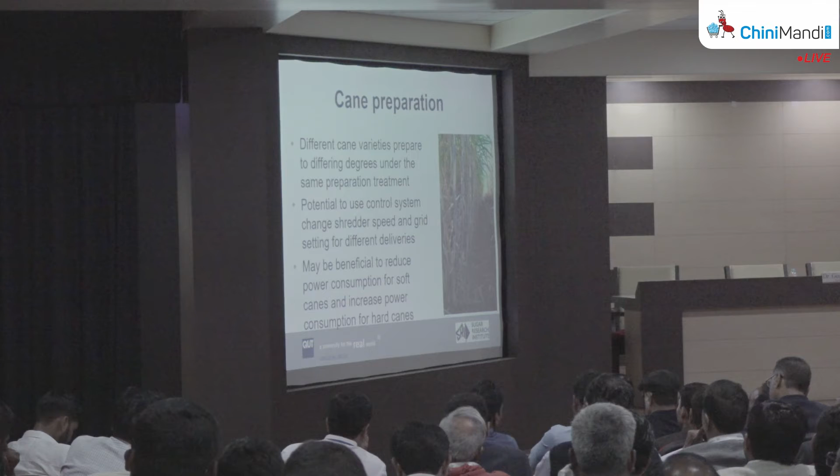So there is potential to make changes with control to things like shredder speed and shredder grid setting for different cane deliveries. It may be beneficial to reduce power consumption with soft canes and increase preparation or power consumption on harder canes, giving a better overall extraction result without increasing overall power consumption. That's something we're still currently working on.

With the added water rate, it's fairly well understood that there is a need to maintain good extraction, and a need to increase the added water rate in proportion to the cane fibre rate.

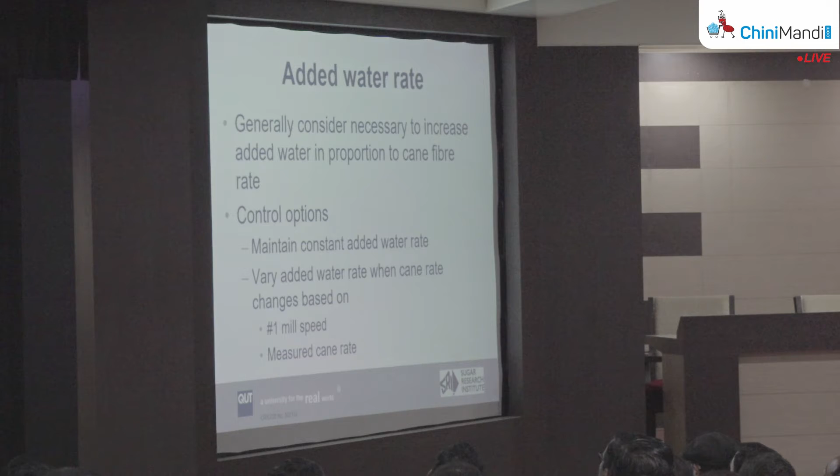When it comes to doing that with a control system, there are many different ways added water rates get controlled. One is simply to have a constant added water rate, manually adjusted as conditions require. Another is to vary the added water rate when the cane rate changes - a simple way is to change it with the speed of the first mill, or more sophisticated, to measure or estimate the cane rate and change it with that.

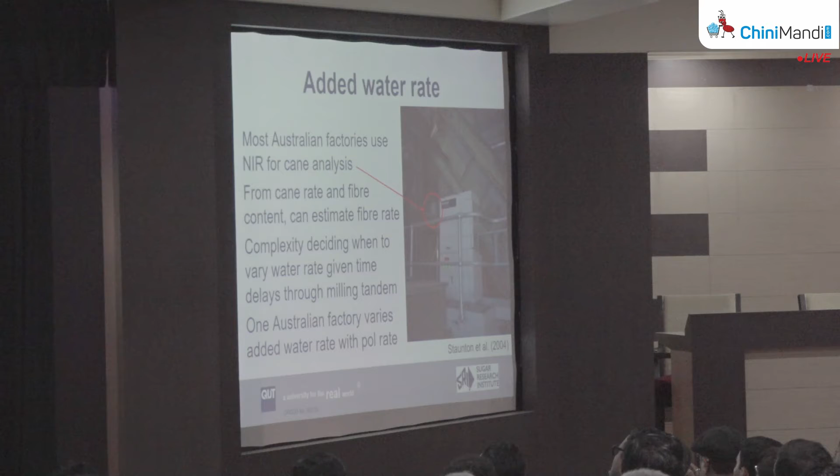Some of the things done in Australia: many of our factories analyse cane using NIR in the feed chute or donnelly chute of the first mill. Given a measurement of cane fibre content online and an estimate of the cane rate, we can estimate the fibre rate, so it's possible to vary the added water rate with the cane fibre rate online.

I'm not convinced it's actually worth doing. One difficulty is that the time frame within a milling tandem can take 5 to 10 minutes for the fibre to move from one end to the other, and then another 5 or so minutes for that water or juice extracted to work its way back to the second mill. By then you've probably moved on to another delivery, so when you make a change it's not particularly obvious.

One of our factories also makes changes to the added water rate with the pol rate, on the basis that it's easier to extract pol from high pol canes. It then becomes a question of whether you're better off trying to take more where it's easy, or devote the water you have available to places where it's not easy, which is often the higher fibre or harder canes. Again, the answers are not completely obvious - we haven't done enough work to really understand this well enough.

Of course, one key point to add to that discussion is that required capacity is a constraint, and generally speaking, when you reduce the size and number of rolls, you also reduce the capacity. So 2-roll mills basically have a significant advantage in terms of reduced power consumption compared to 3-roll mills.

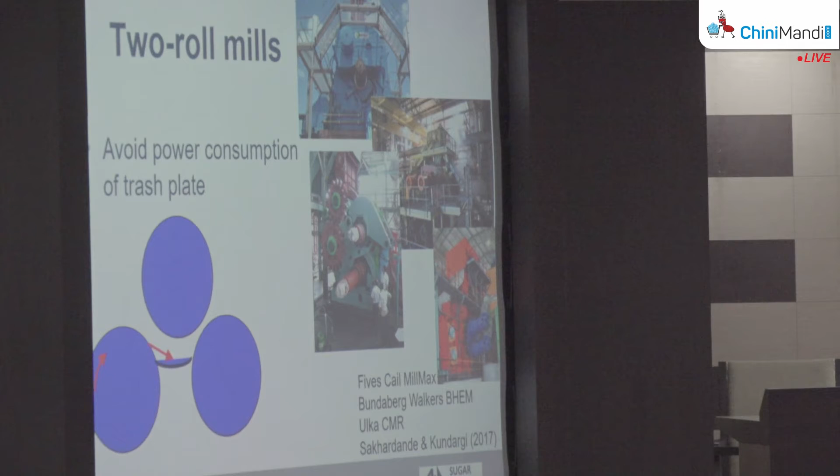That's largely because they don't have a trash plate. If we think about a 2-roll mill and a 3-roll mill with the same size rollers, the 2-roll mill will use only about half the power of a 3-roll mill. But that's not really comparing apples with apples, because the 2-roll mill won't have the same capacity as the 3-roll mill - to maintain that capacity you need bigger diameter rolls. Nonetheless, the principle that 2-roll mills use less power than 3-roll mills is fairly well appreciated, and there are many different 2-roll mill designs currently available, many of them here in India.

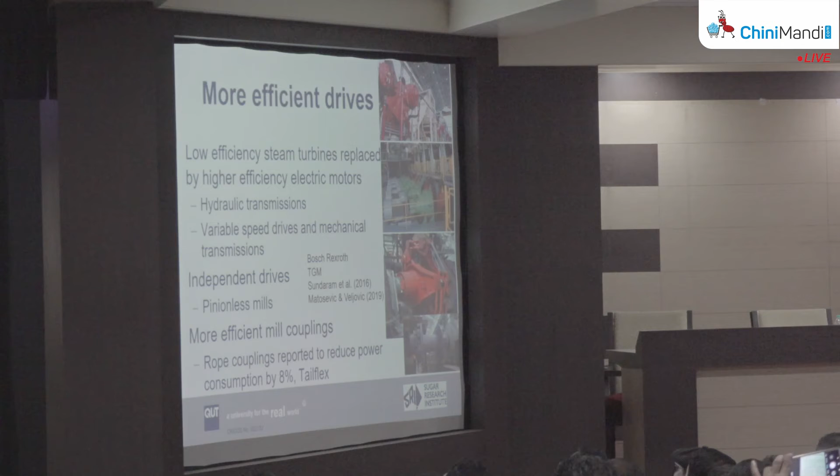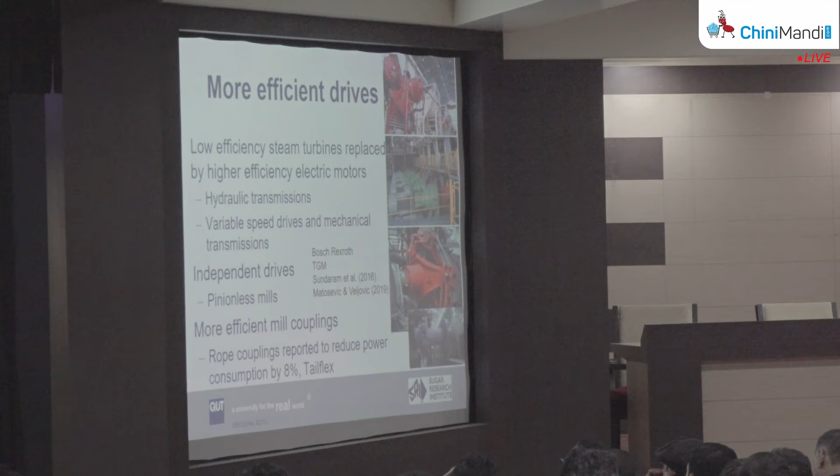One area that is a clear winner is to use more efficient drives. Using more efficient drives, you can achieve the same power consumption in the mill, but use less overall power consumption due to lower losses.

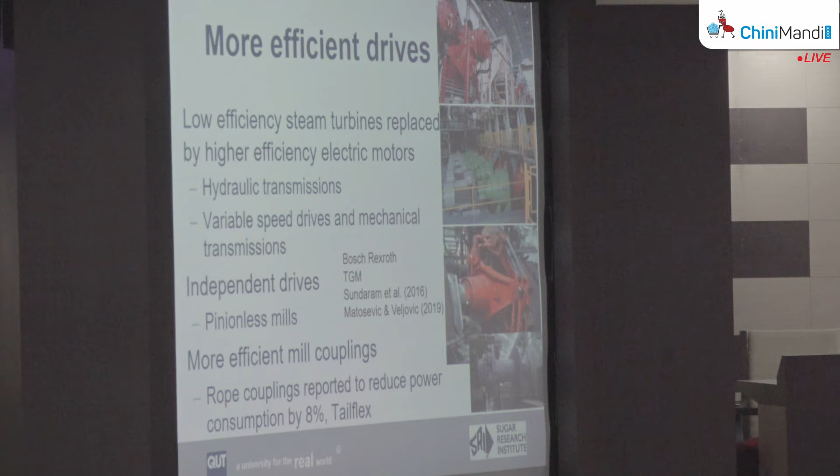So where mills are still driven by steam engines or steam turbines of lower efficiency, we've seen them being replaced by higher efficiency electric motors, using either hydraulic transmissions or variable speed drives and mechanical transmissions.

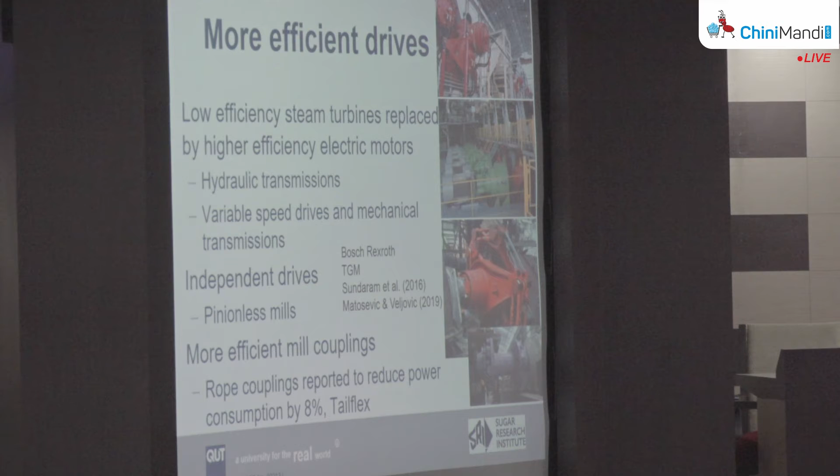We've seen in some places the crown pinions replaced with individual roll mounted drives, presumably with also reductions in power consumption. And more efficient mill couplings being used.

I guess when we're talking about power consumption, we tend to think more about squeezing hard and things like that. The power is a product of torque and speed. So you can still squeeze very hard, and reduce power consumption if you can reduce speed.

Reducing mill speed is largely, in terms of how it can be achieved in a mill, about doing a good job of controlling the level of the bagasse in the feed chute, in the Donnelly chute. If you are controlling the chute level, then you are minimising your mill speed.

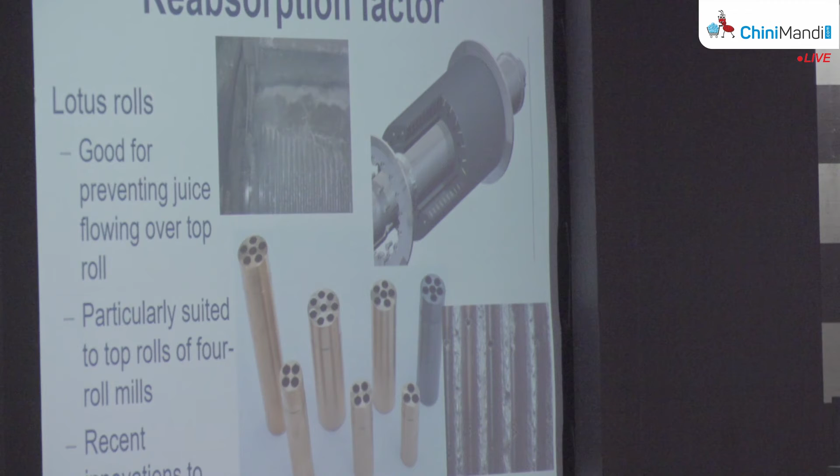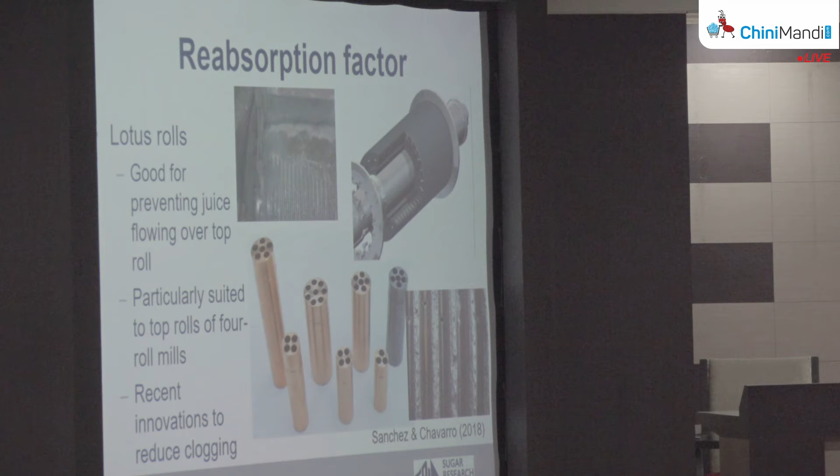Moving on to reabsorption factor. Lotus rolls are gaining in popularity. We've seen massive numbers of lotus rolls being taken up in Central and South America. They work particularly well with the 4-roll mill in that they can be used to avoid the issue of juice flowing over the top roll.

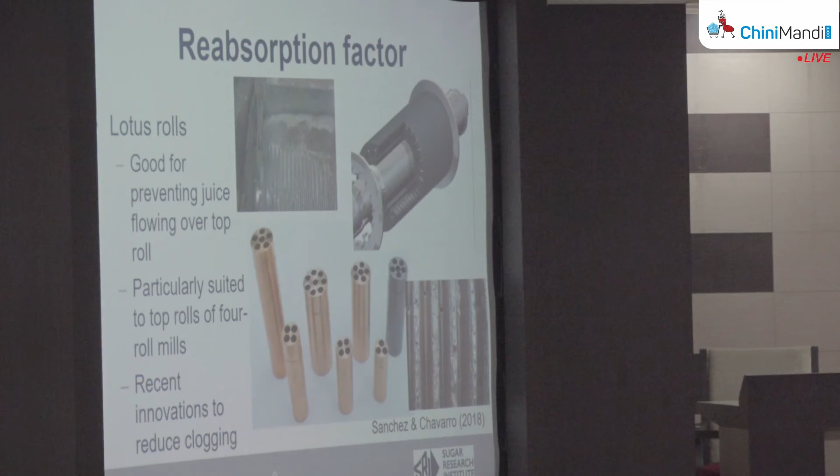And the recent innovations we've seen, to a large extent, are related to reducing clogging and maintaining performance over the cycle. Most of the images there come from a Colombian company, but here in India, SB Reshellers had a similar product.

One area that takes a bit of cleverness is understanding that groove profiles have an impact on reabsorption. What's not so clear is just how best to take advantage of that. What I've shown on the slide here is an image of two ways in which the bagasse can be compressed between two rollers.

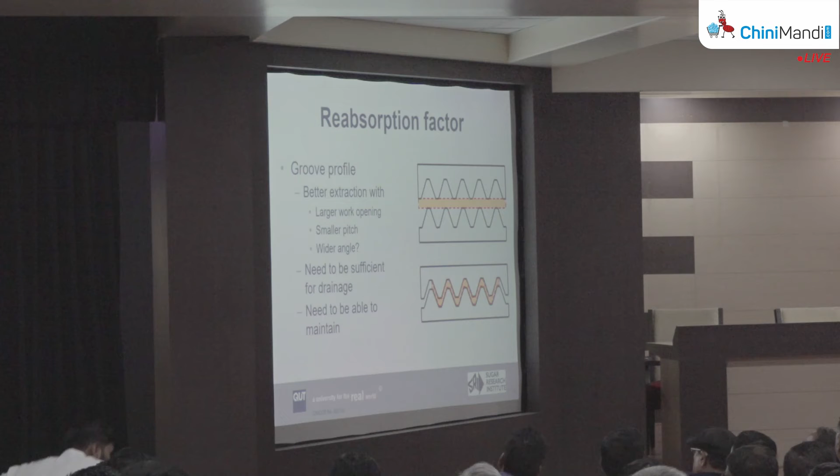The top approach there is really considering the grooved surface of the roll as a series of supports to compress a blanket. In the second diagram, we are seeing the bagasse fold around the groove profile. If you think about it, the top approach, where the grooves are being used to compress the blanket, is going to achieve a much better compression than the second. We're not wasting energy in trying to bend the bagasse around grooves.

So how do we do that? Well, conceptually, smaller pitch helps, giving more supports along the length of the roll. And I guess the complementary approach, because smaller pitch is not necessarily the answer, is to have larger work openings. They achieve more or less the same result.

Experiments we've done, just in simple compression tests, suggest that wider angle has an advantage, but I'm not convinced of the practical application of that.

I guess the things that we need to consider when it comes to grooving is, first of all, whatever groove profile we use has to be sufficient for drainage, and that generally requires smaller angles, not wider. And we need to be able to maintain our grooves in good condition, maintain the roughness. That generally means that small pitch grooving is not all that great.

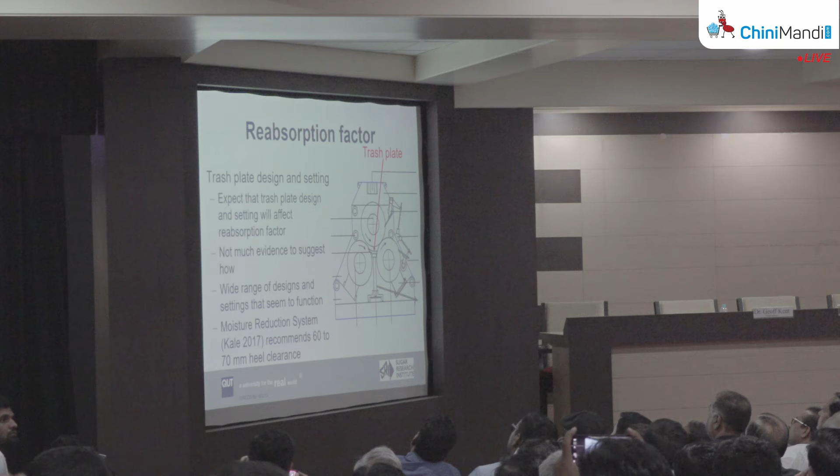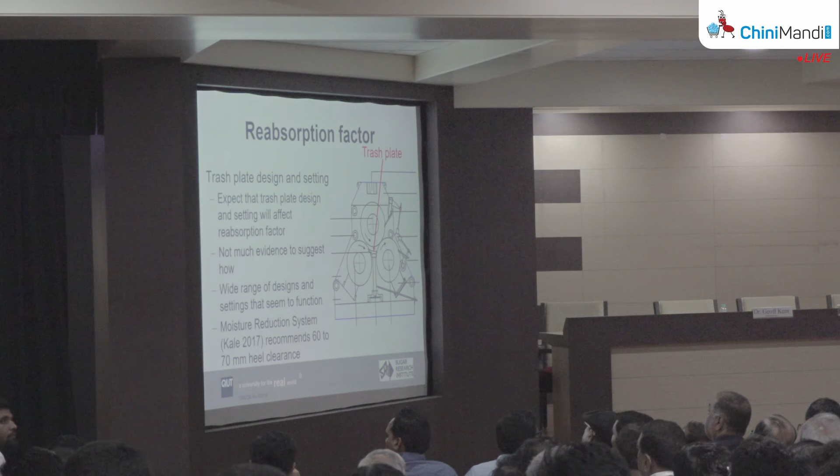If we look around the world, there are a lot of different trash plate designs and different setting approaches used on those trash plates. I fully expect that the trash plate design and setting will have an impact on reabsorption factor, but it's a very complicated part of the mill, and it's not at all obvious how best to achieve those reductions. We do see a wide range of designs, a wide range of settings, and they all seem to work in terms of performing the function that they're there for.

Some recent work from VSI here has recommended quite a large clearance between the heel of the trash plate and the delivery roll - 60 to 70 millimetres. That's much larger than we use in Australia, and I'm not convinced that we could do that with what I suspect is softer canes that we have. We have a particular problem with fibre falling down between the end of the trash plate and the delivery roll, so we tend to make that gap small.

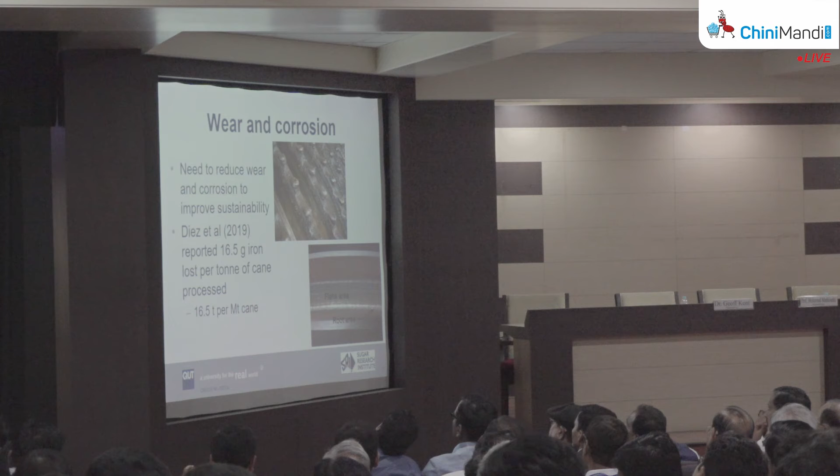Another aspect associated with sustainability is the fact that there is an incredible amount of wear that occurs through the extraction process. A measurement presented at ISSCT last year from Argentina reported 16.5 grams of iron lost per tonne of cane processed. If we scale that up, that's 16.5 tonnes of metal lost per million tonnes of cane crushed. So we're talking about losing one roller every year in many factories. That's an awful lot of metal that's lost, and reducing wear from a sustainability viewpoint must have a place.

Some of the approaches used in mill rollers to reduce wear include the application of picots on the surface of rolls, very common in Central and South America. An area that is used in some parts of the world that we are doing some work on now is to clad the sides or the flanks of the grooves, and also use higher strength, higher durability cast irons to reduce the wear. There's still plenty of potential.

So that's, I guess, the main points of my presentation. The easy approaches to improve performance involve extra resources, which from a sustainability viewpoint is probably not the best way to go. But having said that, there is potential for improvements in control to make better use of resources, and also, as I've talked about, changes in design which can also achieve those objectives. Reducing reabsorption is a very sustainable way to increase outputs without increasing inputs. So it's an area that certainly deserves more attention. Thank you.

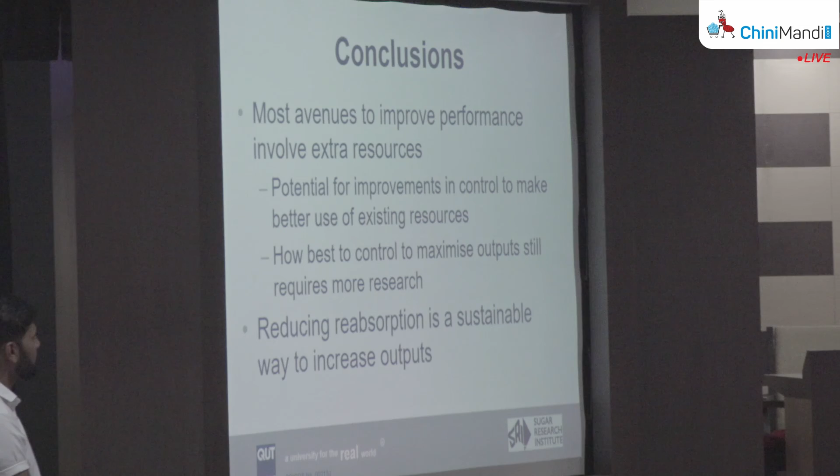Our experience started with fibre as the primary parameter of interest, even though it's a rather strange one to be measuring, but it's the one we made use of first. Since then we now have good calibrations for brix and pol as well.

It's one of the peculiarities of the Australian cane payment system that we analyse the juice, the first expressed juice, rather than the cane itself. So when you're using NIR, although you're looking at the cane, because of the way our cane payment system works, you're trying to infer what the actual first expressed juice brix and pol are. It's a strange way of doing things, but it's the way we've developed in our country. Does that answer the question?

R.P. Patil, works manager from Kanpur Sugar Factory. Like other factors affecting reabsorption, does the hydraulic pressure on the mill affect reabsorption, and what should be the hydraulic pressure kept from first mill to last mill to avoid reabsorption?